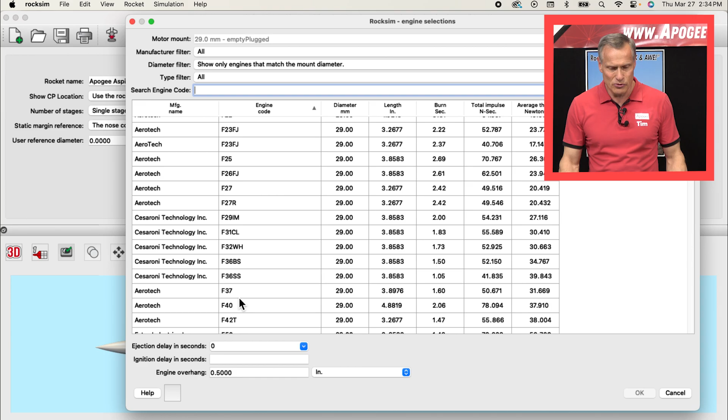When we run a simulation, first we're going to load a rocket motor into it. And I'm going to choose, let's say, an F42, and I'm going to make it plugged. So basically, a plugged motor means it has no ejection charge. So its trajectory should go straight up and then just come straight down. I don't care about it coming straight down. I just want to know how high it goes. And by plugging the motor, it makes the simulations run faster. So that's what I'm doing here.

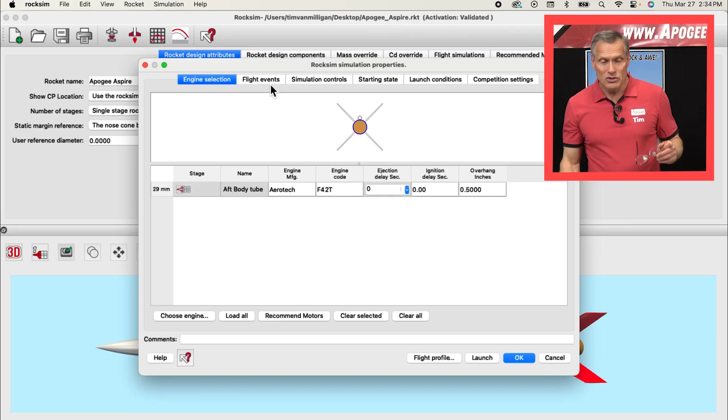Then when you set this up in RockSim, you have to make sure you're comparing apples to apples. And RockSim likes to vary things to try to figure out things like the coefficient of drag. And because of this, in order to compare apples to apples, we need to zero some things out. So first off, I'm going to go to the starting state, and I want to make sure that I'm launched straight up. Okay, so here my launch angle is 0, which means our rocket's going straight up.

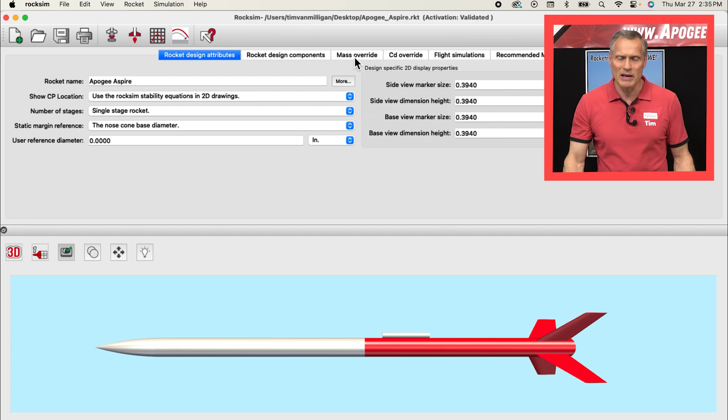Next, I want to go over to the launch conditions, and I want to specify no wind, because I don't want wind affecting the trajectory of the rocket. I just want it to go straight up and come straight back down. The next thing that I want to do is, I'm going to cancel out of this, as I want to go here to the mass override tab. Here, what we want to do is we want to make sure that the basic rocket doesn't change at all. So we're going to use a mass override to just lock it in place.

To do that, we're going to check this box here, but before we do that, I want to come and find out the current mass of the rocket. I'm going to do that by looking at the 2D side view of the rocket, because down here, it shows you my current mass of the rocket and where the center of gravity is located. So on this screen right here, we'll have a sustainer. Its mass, I'm going to use this down here, 60.78 grams. So I'm going to type that in.

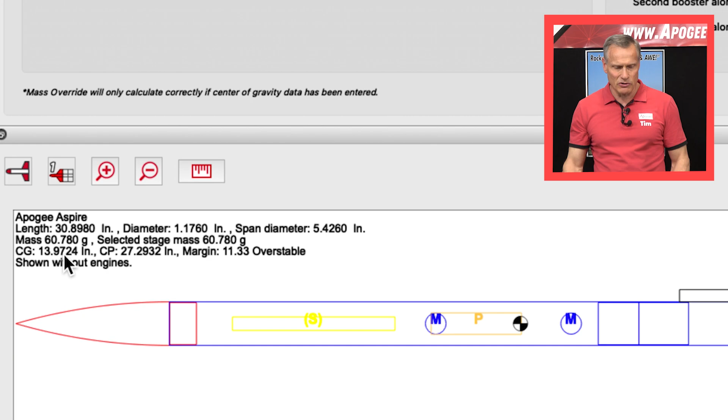And then I want to use this center of gravity, 13.9724 inches. And then I want to check this box here. And so basically it's saying use these values for all the simulations we're going to run. So basically I want to lock that center of gravity in place, because when we start varying the mass, where is that mass going to go? And I want it to go right at this center of gravity.

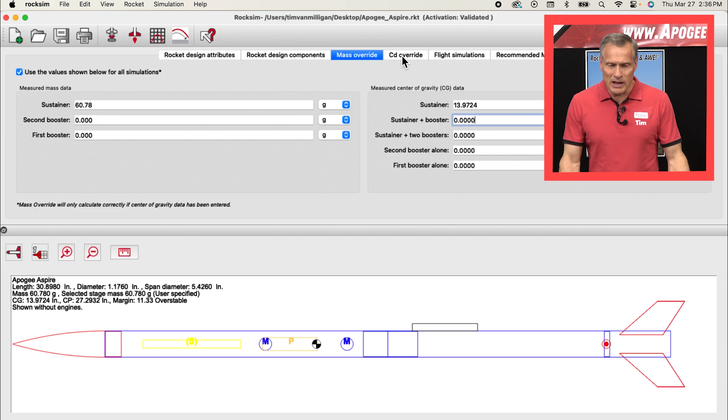Next, I want to go to the Cd override tab. And again, we want to compare apples to apples, and we don't want RockSim to calculate the CD for us, because CD actually varies based on the speed of the rocket. And we're just going to say one CD value. So we're going to use a CD, we're going to start at 0.75. If you don't know what CD to use, that's a good one to start at.

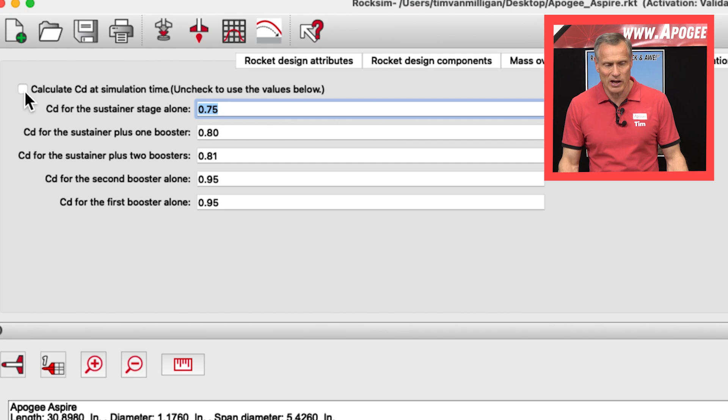And you want to make sure that this box is unchecked to use this value right here. If you check it, it's going to calculate the CD automatically. We want to force in a constant CD. So once we do that, we can launch the rocket. So I'm going to go back here, and I want to see the flight profile. Oops, I lost my engine when I said cancel. Make sure that all my other things stayed the same. And we're going to see flight profile.

Okay, so our rocket is sitting down here, and we're going to just click launch, and it should go straight up and turn around and come straight back down. That's the way we set it up. Down over here, we can see an altitude of this rocket, 2,700 feet approximately. So now it's coming straight down.

We're going to cancel out of that, and we'll just see right here on the summary screen how high this rocket went. So it went 2724 feet. So now that's kind of like our baseline. So now we're going to run optimum mass calculation, and this is automated in RockSim. You just go up to the simulation menu and then come down here to predict optimal mass.

So when you're doing this, the first thing you can do is just have it automatically calculate the optimal mass, and I'll do that. So we'll check that box and then just say start the simulations, and you can see it's already done. It tells me that my optimal mass is 111 grams, and if I have it at 111 grams, this rocket should reach about 2831 feet.

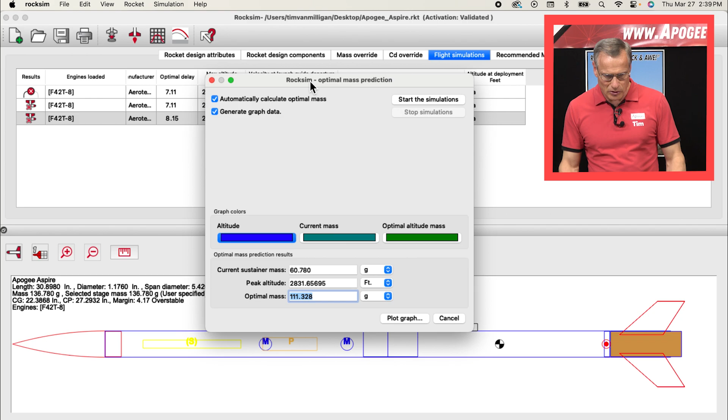So before, if I move this out of the way, you can see we're at 2724 based on 60 grams. Now this is our optimal mass. So basically, if I add more mass to this rocket, it's going to go higher. I want to plot this graph, and I want to show you this chart here.

This is a special chart that shows the mass of the rocket down here and the altitude that it will reach. So at our current mass of like 60 grams, it reaches that 2724 feet. And then our optimum mass is way over here at 111 or something grams, and we get up to there.

So what's important about this graph is you'll notice that the top of this curve is relatively flat. So if we're off by a few grams in either direction, we're not going to lose much altitude. So basically, we could say anywhere from 100 grams to 120 grams is that optimal mass range for this rocket. And I should also say it depends on the rocket motor. It's only that value for the F-42 rocket motor that we put into it.

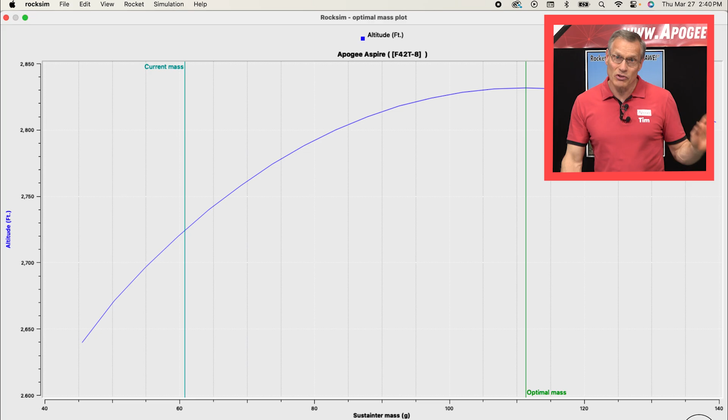So I'm going to click OK. This chart, by the way, has a special name. It's called a Malewicki chart. And it's named after Douglas Malewicki, who's the first person that calculated these charts. In the 1970s, they had to do it longhand. Now we can do it with a click of the button in RockSim.

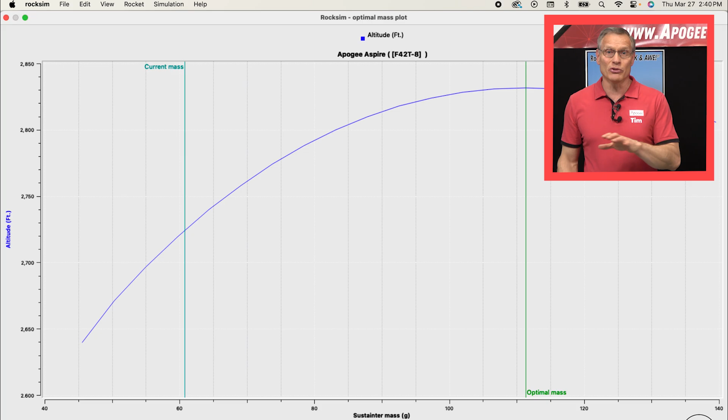Okay, so that was that. You can uncheck this box here. I'm just going to redo it. Again, remember it's 111.3 grams. If we uncheck that box, this selection shows up and we can force it to run simulations for us. So I'm going to start with a mass of 60 grams and I'm going to go up to 300 grams. And let's change the mass increment to every 5 grams. So every launch simulation is going to increase the mass 5 grams.

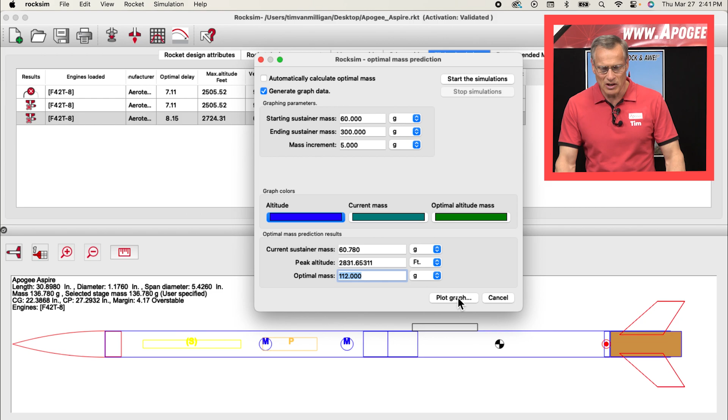We just start the simulations. You can see it's just flying through them really quick. And again, now this time it changed it just a little bit to 112 grams. But when we plot the graph, again, we get that same graph with that nice flat area here up on the top.

Okay, so let's do another little experiment. Let's change our coefficient of drag. Instead of 0.75, let's make it like 0.45 and then just run a simulation. So by lowering the coefficient of drag on the rocket, what do you think happens? Now, the coefficient of drag, for those that don't know, is kind of a measure of how efficient a rocket is. So the lower the number, the more efficient it is, the more it just slices through the air like a hot knife going through butter. So you want a low coefficient of drag.

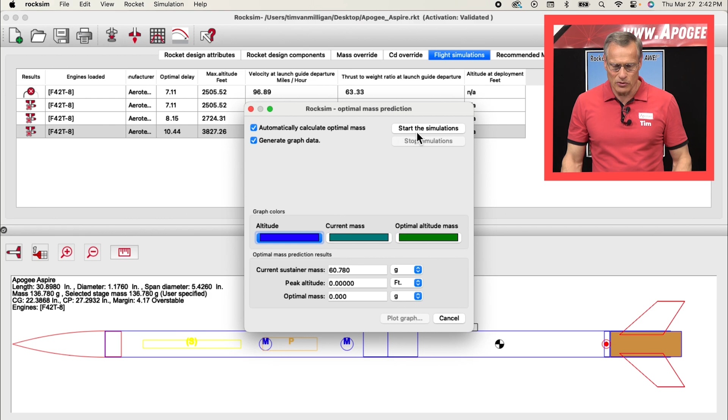And when you lower the coefficient of drag, and that's all we did, we went up a little over 1,000 feet. And if we look at the optimal mass, do another prediction of that, and I'm going to just do an auto generate and just start. And you'll notice that now my optimal mass also lowered.

So if you use a really high efficient rocket, you're going to want a lower mass of the rocket to go to a higher altitude. So that's the point, is when the coefficient of drag goes down, your optimal mass is going to go down.

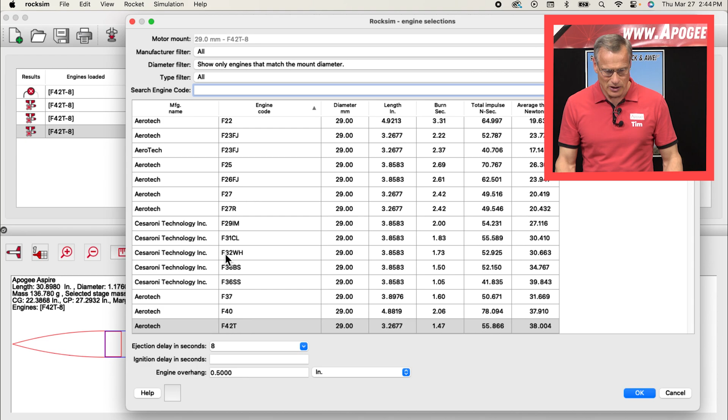The next thing we want to do is to change the rocket motor in here. So here we have an F-42, and I'm going to load in a different rocket motor, and I'll show you the difference by changing a rocket. So I'm going to go from an F-42 to an F-10. And again, I'm going to just have it a plugged motor so that it just goes up and comes down. Click OK. We're not changing any of the launch variables except for the rocket motor. And when we launch it, we'll see what we do.

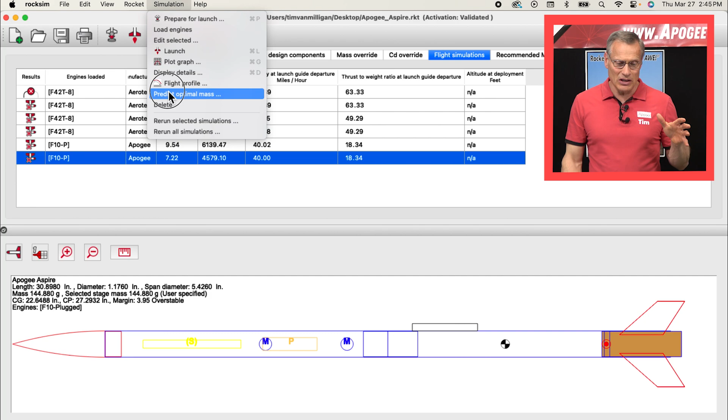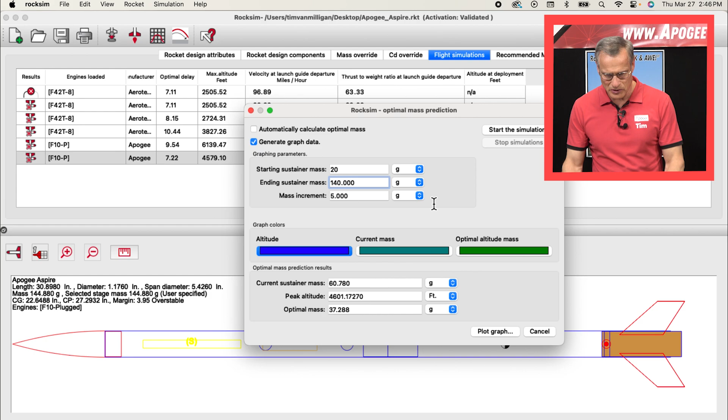When we start the simulations and plot the graph, you'll see that our optimal mass dropped significantly here. In fact, we're having a hard time actually seeing a curve. So when this happens, and I'll explain what's going on over here in a second, what we want to do is to run the simulations. I'm going to start at 20 grams. I'm going to go up to, let's call it 140 grams, start the simulations, and still coming out with about 35 grams. We'll plot the graph, but what you can see is now this curve is starting to flatten out.

And actually, if we extend this a little bit further this way, that optimal mass is probably pretty close, about 35 grams. The point is, when you change the rocket motor, you got to run new optimal mass simulations. When the thrust level of the rocket motor comes down, your optimal mass is also going to come down. So we had an F-42 versus an F-10. So the difference between an F-10 and the F-42 is the average thrust. On the F-42, the average thrust is 42 newtons. On the F-10, the average thrust is 10 newtons.

So think of it as how hard you're pushing down on the accelerator pedal of your car. The higher the number, the more you're pushing down. So the F-42 is going to have a higher liftoff speed than the F-10. The faster you take off, the more weight you have to put into the rocket to get it up to optimal mass. This is where if you stage a rocket, say that you put a booster behind it. Now when it stages, this is going to be going faster. And when we go faster, we can put more weight into it.

So if you're doing a two-stage rocket, the optimal mass you predict with just a single stage is actually going to be higher when you do it as a two-stage. So that's kind of an advantage of a two-stage rocket, is you have more leeway, you can put more weight into it. So in a rocket like this, how would I put more weight into it?

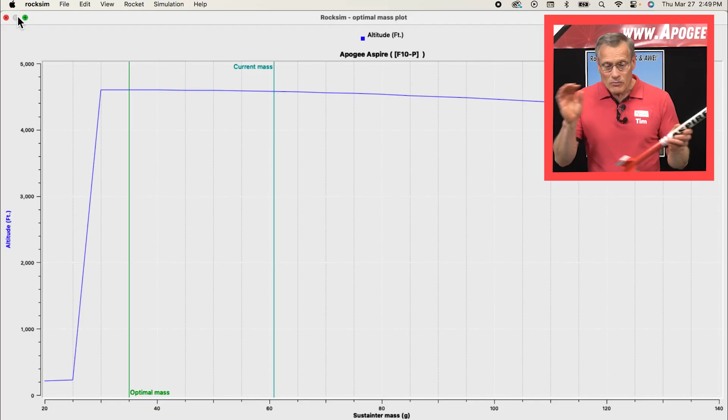So now I want to talk about what's going on here at the beginning of this curve, because it took me a while to figure out what was going on. So for this, I'm going to actually change rockets, and I'm going to open up this one right here. I'm going to say no to this. This rocket right here that I'm holding in my hand is one of my competition lightweight rockets that I like building. It's very lightweight. I actually weighed it before I came in, and it weighs 12 grams.

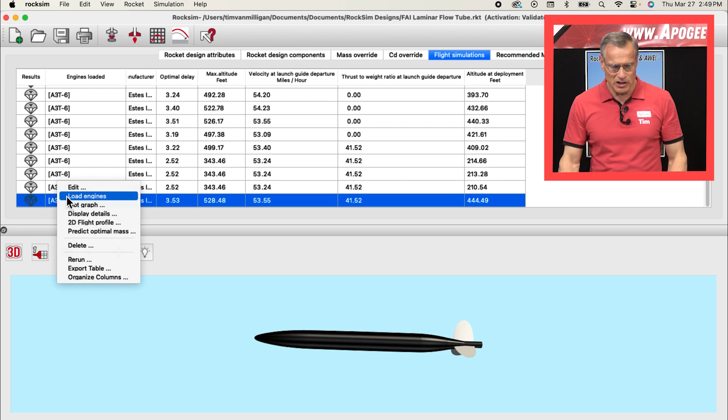And inside is a helicopter. So this is actually a helicopter model, and all up is 12 grams. So what would be the optimal mass on this rocket? I'm going to start by loading an engine in there, and then I'm going to make sure my Cd override. I'm going to start out at 0.4 for my coefficient of drag.

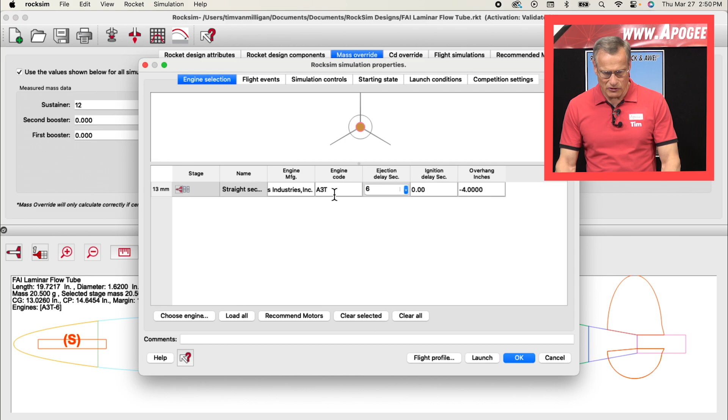Mass override, I'm going to set it at 6 grams. As a starting point, well, let's bump it up to 12 grams and then put the center of gravity, I'm not sure what it was. Center of gravity is 11.744. So I'm going to put that as my mass override, 11.744 inches, and then check that box. So we have an A3T-6 motor in here. We're going to launch straight up with no wind, and let's see what it does when we launch it.

This rocket went 346 feet. So then when we run the optimal mass and generate the mass, and it comes at 9.855, and plot the graph, we get this nice curve right here. And it didn't do what I wanted it to do. But that's a beautiful graph.

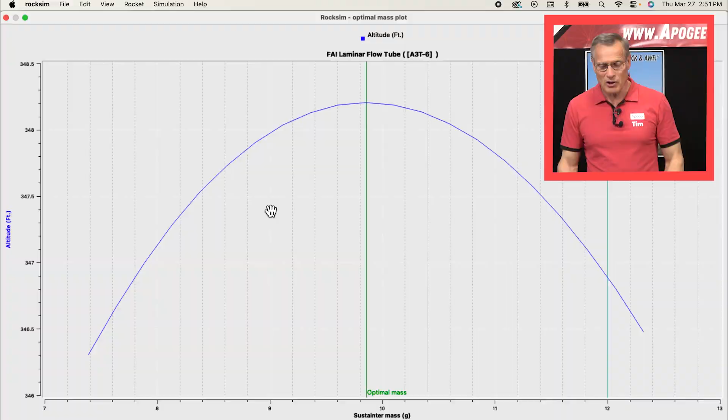So at 12 grams, I'm a little bit heavy. So I'm probably down here, but this is 348, this is 347. So I'm not losing much. I'm losing just a couple of feet by being a couple of grams too high. So I'm not too worried about it. And that's the whole point, is look at this curve, find out where your mass is, and you can decide whether or not it's worth it to spend that extra time to try to remove mass from your rocket. It's easier to add mass, it's harder to remove it.

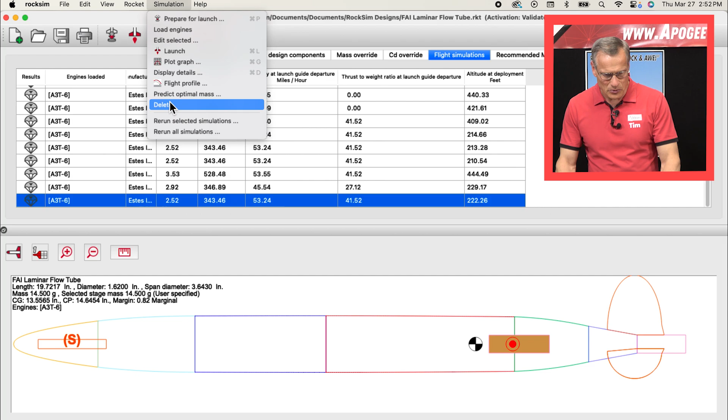Next, I want to go and try something different. Let's try it at 6 grams like I did before. Run a launch. Okay, again, it's a little bit different. And running the optimal mass, start the simulations, plot the graph. Similar graph. Now it's working fine. Yeah, so basically, I didn't get to show you everything that I wanted to show you, but I wanted to give you a little bit more information here.

If you'd like to know more about optimal mass, we've written a newsletter about it. It's Peak of Flight newsletter number 200. And this came out in January of 2008. Physics hasn't changed, so the information is still good.